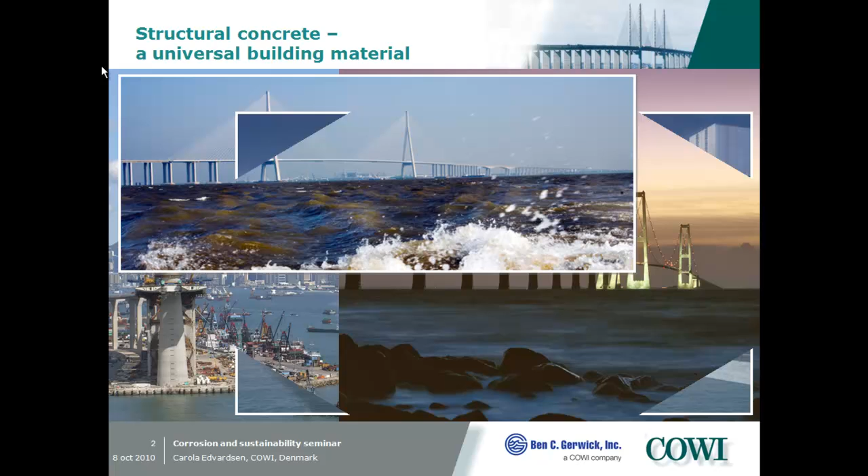Concrete is our most universal and robust construction material which we have on Earth, and has therefore obtained a dominating position in construction. We have designed very spectacular infrastructure projects. Here the last one is a composite bridge in Lucerne.

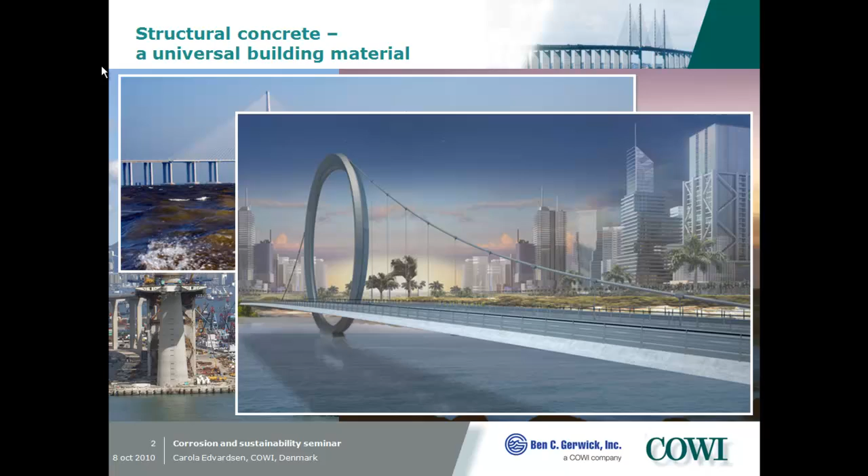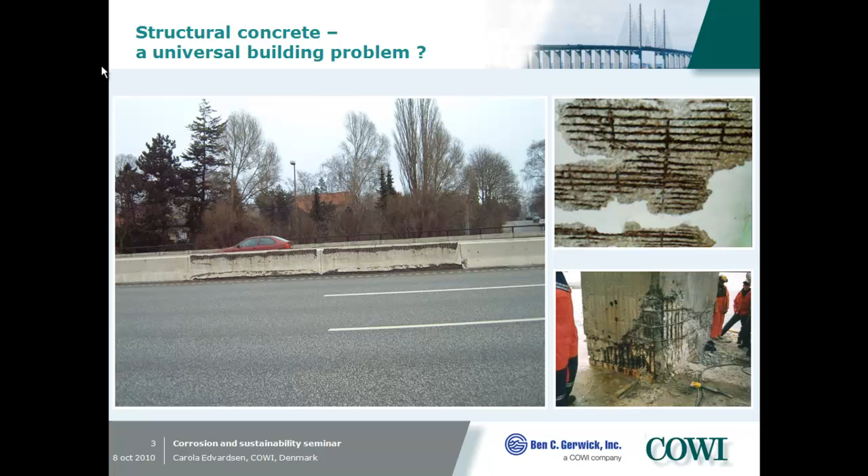Unfortunately, we also see this kind of structure: a heavily corroding crash barrier at a Danish motorway, a deck and a column after, say, 20 years of exposure to the de-icing salt. Similar happens also in this part of the world, very close where we are. Have a look, this is a pier very close to the Golden Gate Bridge. You might know it. Also here, very heavily corroding crash barriers.

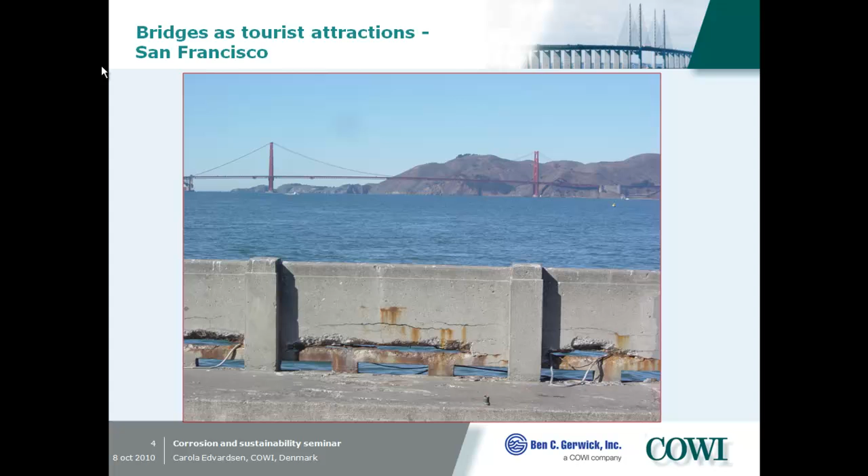The deterioration of concrete structures, or the service life of concrete structure, requires an understanding of the deterioration which is ongoing. Aging and degeneration is a natural and unavoidable process of all construction materials. It is not the question that they degenerate, but the question is at what rate.

For concrete structures, we have normally three typical mechanisms: the electrochemical ones, the rebar corrosion; we have chemical ones, alkali silica reaction, sulfate attack, delayed ettringite formation; and physical ones. I believe you will go into this a little bit more later on.

Nowadays, our clients require service life of about 100, 120, and even more years.

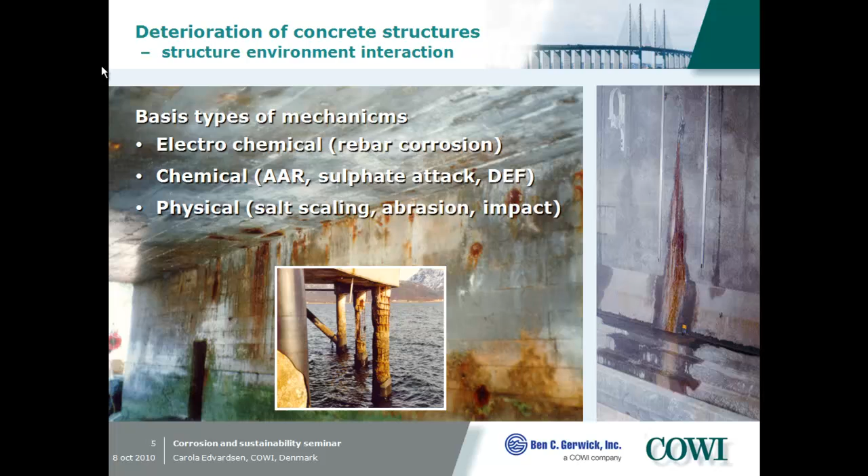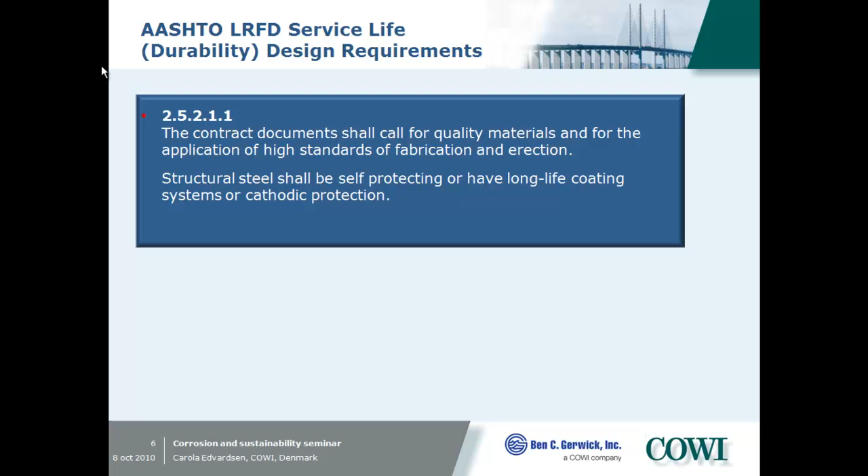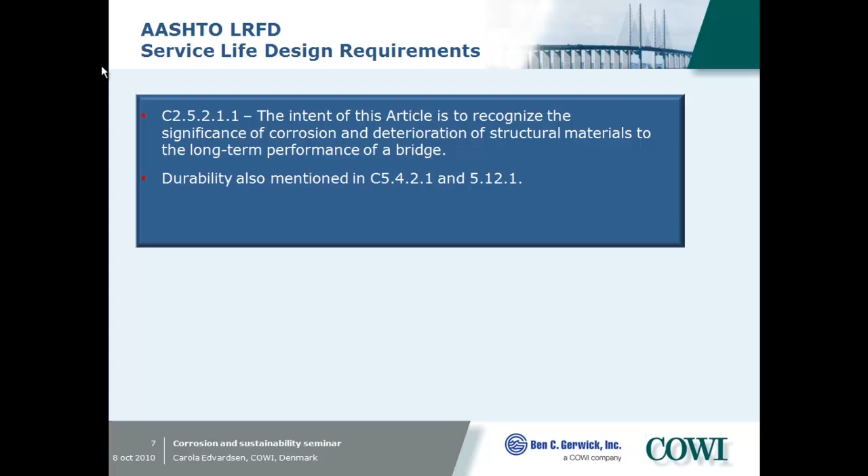Let us see what our traditional codes say, quote, with regard to concrete and durability. I had a look in your standards, and I found very few remarks on concrete durability. They are very general, as quoted here. It is to recognize the significance of corrosion and deterioration. This is very few lines of what we expect in the standards.

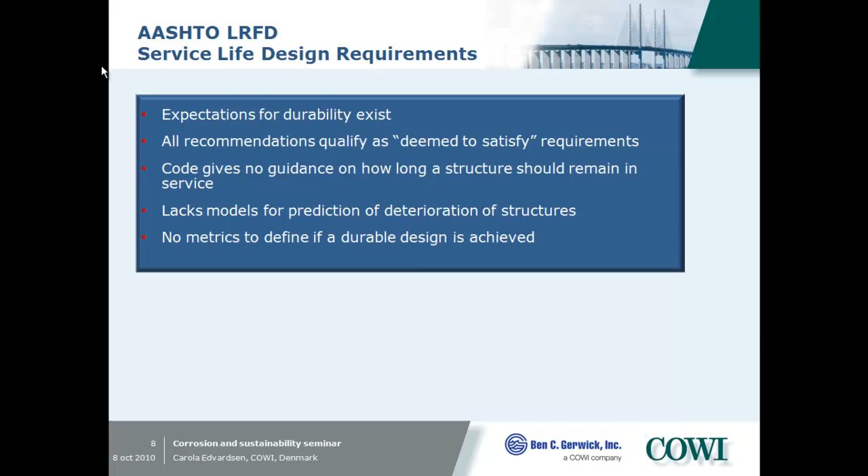We can conclude that there is some expectation for durability in your standard, but all recommendations are qualified as deemed to satisfy requirements. And the standard gives no guidance on how long a structure should remain in service. It lacks prediction models, and there is no test method to verify the service life of a concrete structure. And this accounts not only for your code and standard, this accounts also for a lot of European standards.

This means, and we should be aware of that, all codes normally require the minimum quality. The knowledge in the codes is often based on knowledge which is 10 or sometimes even more than 30 years old. The durability of concrete structure is introduced by so-called substitute requirements. And the service life assumed in the standards is normally only 50 years. But today, our clients demand more. So this means our traditional codes and standards are not adequate anymore as service life design basis.

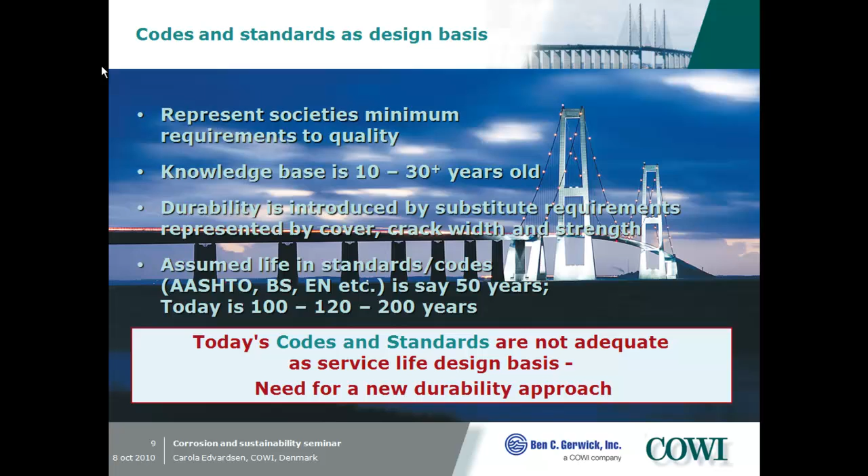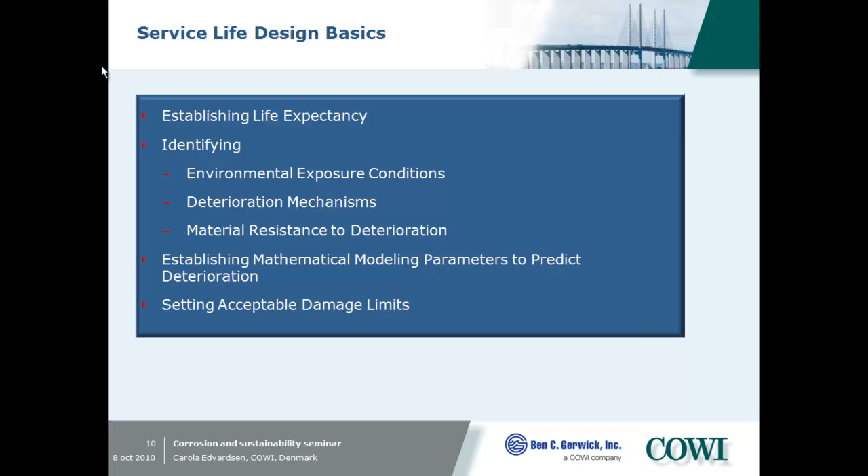We need new durability approaches. And what would we expect as a new durability approach? At least these different items: we have to establish the service life, we have to identify the environmental exposure, we have to identify the decisive deterioration mechanism, we have to establish some mathematical modeling to calculate the deterioration, and we have to set some damage limits, acceptance criteria.

The awareness that our traditional codes are insufficient has been known since the 90s, during the last century, at least in Europe. And therefore we developed in Europe, within a European research project which we called DuraCrete, in the late 90s, a new durability design tool. It's actually a probabilistic-based, performance-based design tool for concrete structures. 12 European partners were involved, starting from the industry to research institutes, contractors, and even clients and owners were involved.

And this new tool, which has been developed within this European research project, is commonly called DuraCrete. COWI was the scientific manager of this DuraCrete project. This new durability tool

is now implemented in the new FIB model code for service life since 2006. It has heavily been used in Europe, and in addition it will be implemented in the new FIB model code, which has been presented in Washington this year.

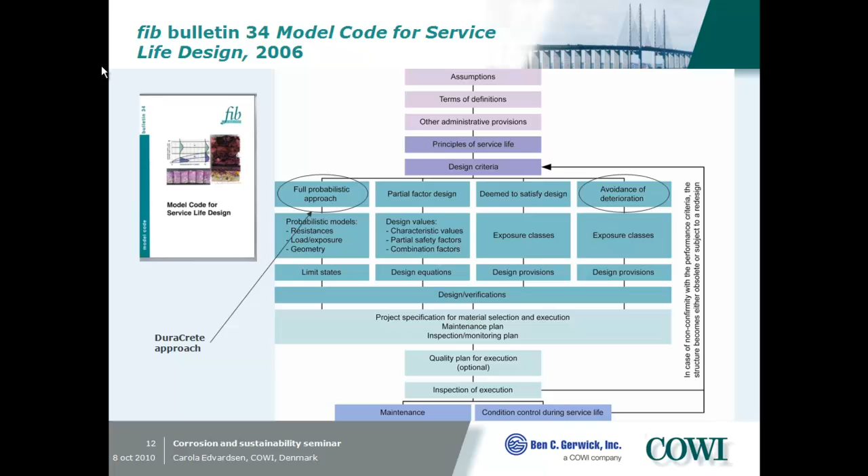Here again there are 2 approaches. To the left, the full probabilistic approach. Within this full probabilistic approach, which accounts for carbonation and chloride-induced corrosion, the deterioration will be modeled. And this modeling is the key tool to make a true service life design. You might know all this service life which we have for concrete structure here.

Normally we have an initiation and a propagation phase. And within the purpose of this full probabilistic approach, we find the optimal design. This means the optimal cover or the minimum cover, and the optimal material to resist the deterioration for at least a certain period of time.

In contrast to that, strategy B says you have to avoid the deterioration right from the beginning. We can use non-reactive aggregate, sulfate-resistant cement, we can use steel fiber reinforcement, stainless steel, cathodic prevention, protection.

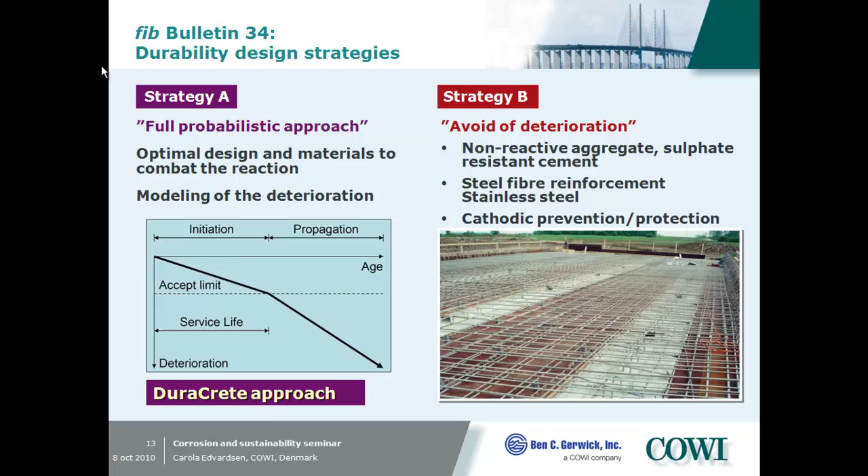I will show a bit more of the full probabilistic approach. Here are the different steps of the full probabilistic approach, which I will call DuraCrete in the following, but it's nowadays similar to the fib model code.

There are different steps, and the first step is to define or select the decisive deterioration mechanism. Is it chloride-induced corrosion, or carbonation-induced corrosion, or something else?

Then we have to define the limit state. The client has to say what determines the end of the service life. Is it the corrosion start? Is it the cracking of the concrete, or the spalling of the concrete?

Then we have to define an acceptance criteria. This means the probability of having corrosion after 100 years or 200 years. And as it is a probabilistic approach, all parameters have to be quantified in a statistical way. I will show this further.

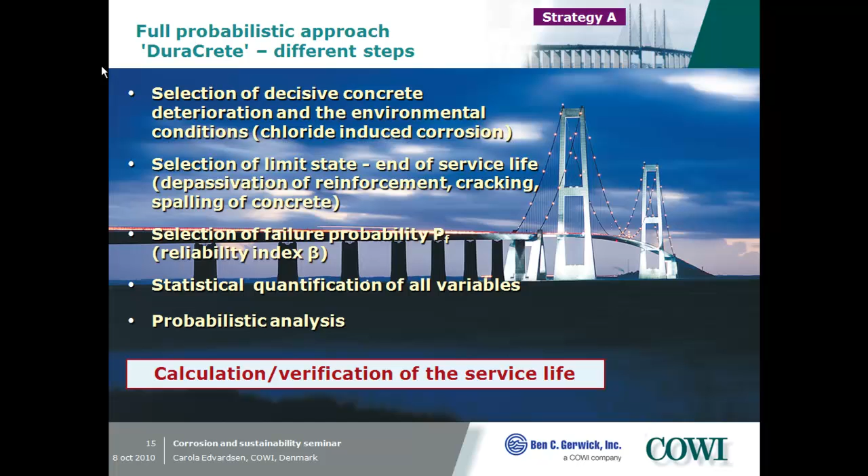Here is the first step, the selection of the limit state. The limit state means the end of service life. For chloride-induced corrosion, the end of service life is normally the period when corrosion starts.

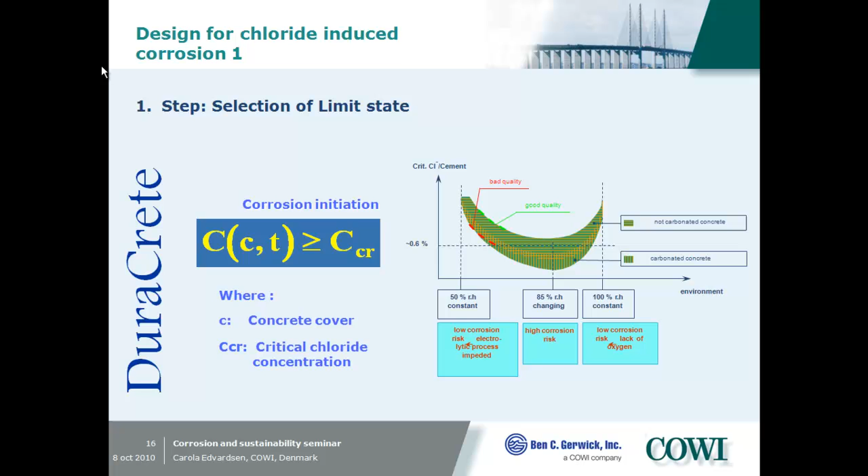In our case, we define the limit state as when the critical threshold limit is achieved at the reinforcement. This critical chloride threshold level depends on a lot of influencing parameters, as you can see here in this illustration to the right.

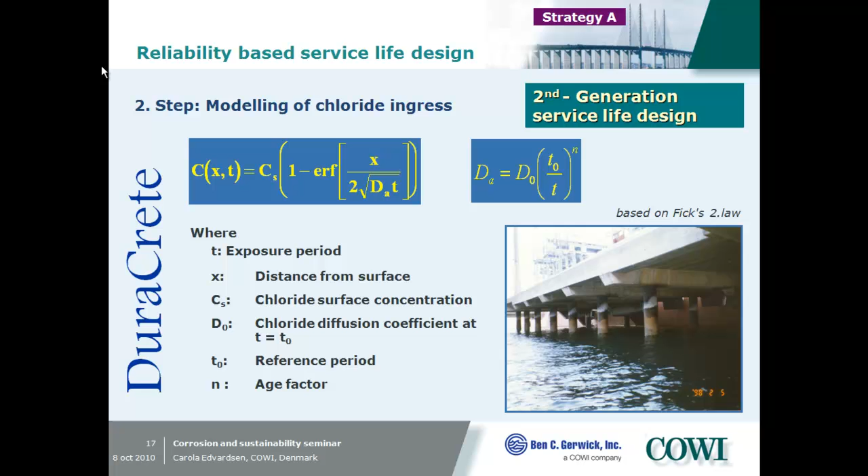The next step is modeling the deterioration. In that case, we use a model based on Fick's Second Law, which is a well-known model for chloride ingress, but modified by a chloride migration coefficient, D, and by an age factor, because we know the concrete becomes denser with time. This means the chloride migration coefficient decreases with time, and this is the famous age factor here on top.

The next thing is to put in the input parameters. As a probabilistic approach, all input parameters have to be defined by a mean value, a standard deviation, and a distribution function. Here again, the chloride migration coefficient, for example, a reasonable value for Portland cement and fly ash cement. This chloride migration coefficient is one of the key durability parameters which the contractor has to comply with. It's similar to the compressive strength.

If we make a structural design, we specify a compressive strength class, for example C40, and the contractor has to produce a concrete with this compressive strength, making a lot of testing during pre-testing and production testing. Similarly, we now require this for the chloride migration coefficient. It's a functional requirement in our concrete specification, and the contractor has to comply with that during pre-testing, full-scale testing, and production testing.

It's a very new approach, but I must say our contractors in Europe have adopted this approach over the last 5 to 10 years.

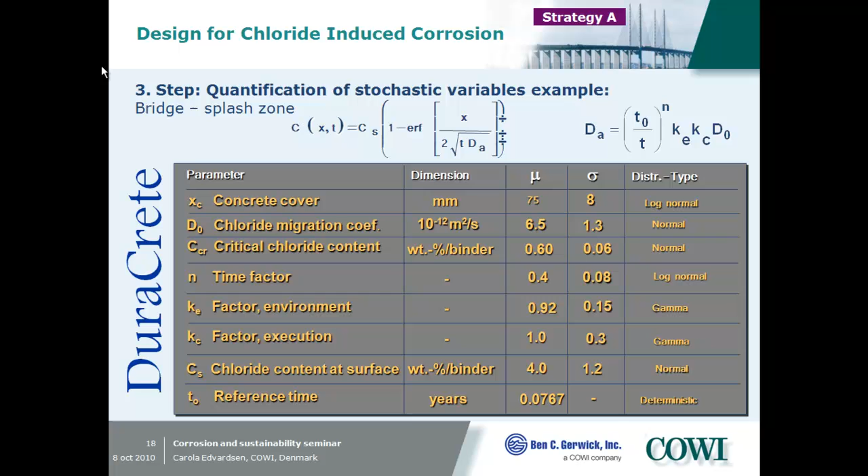So they measure the diffusion coefficient instead of doing column tests? Yes, and I will come back to this again. Yes, this is very interesting.

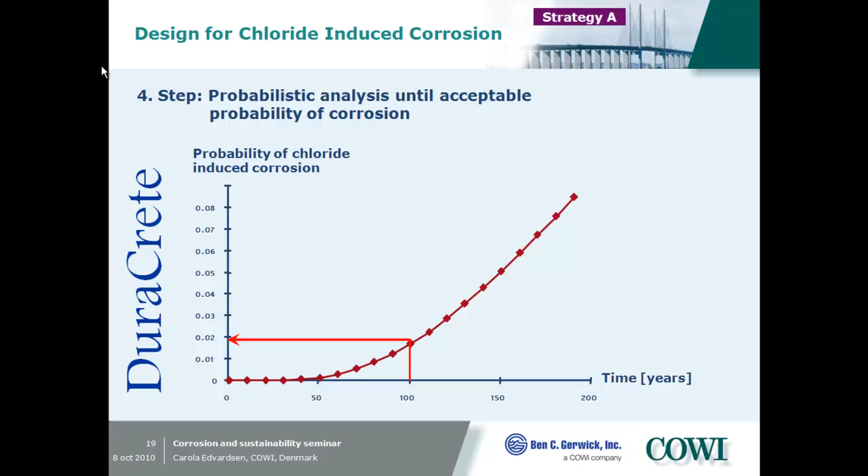At COWI, we have used this DuraCrete or fib model for the last 10-12 years on all our larger infrastructure projects - tunnels, bridges, and marine construction - especially if they are exposed to an aggressive environment. This tool allows us, as a consultant and designer, to calculate the minimum cover and the maximum chloride diffusion migration coefficient to ensure a service life of 100, 150 years, or whatever is required.

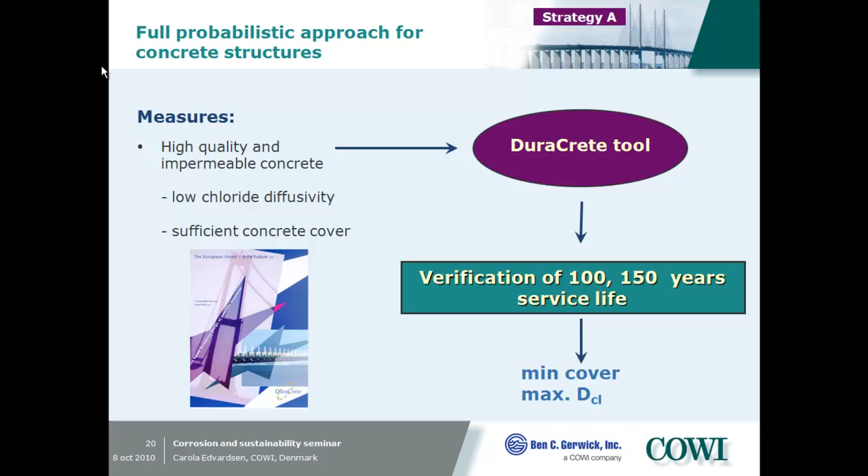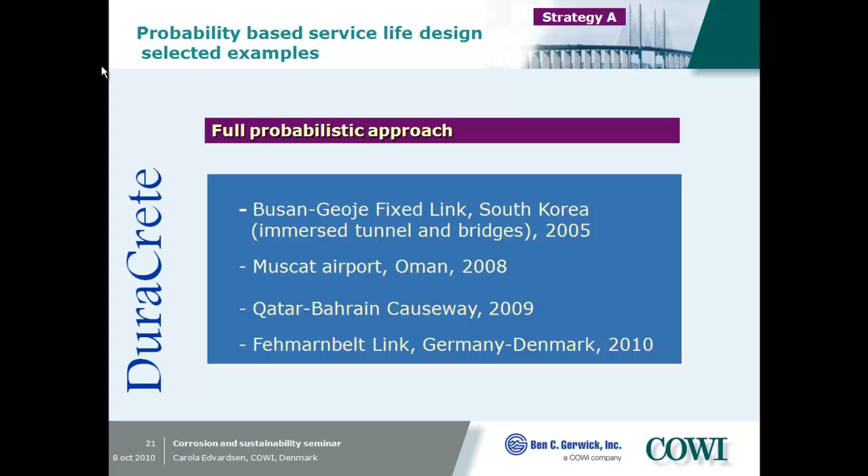I will show some examples. The first example where we used this approach at COWI is in South Korea - the Busan-Geoje fixed link, which connects the city of Busan, Korea's second largest city, and the island of Geoje.

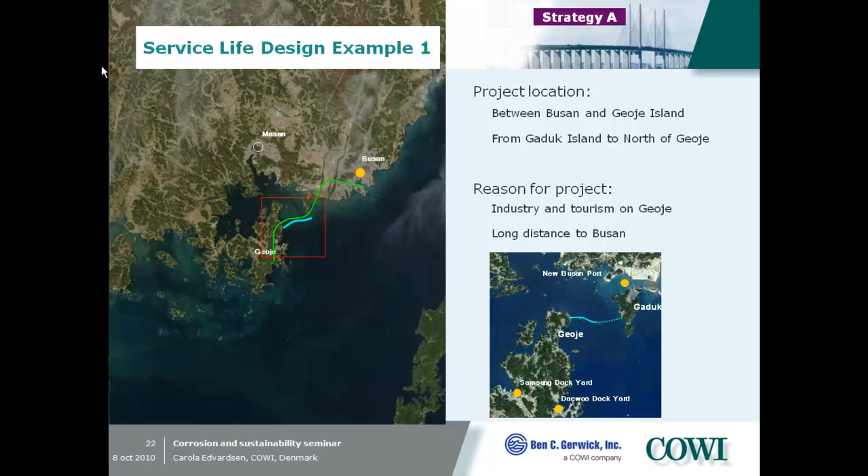The reason for the link was to shorten the distance between these two cities. The link consists of an immersed tunnel, which you can see here - it's the deepest immersed tunnel in the world with 50 meters of water pressure, giving high demand on the water tightness of the joints and so on - and two cable-stayed bridges here.

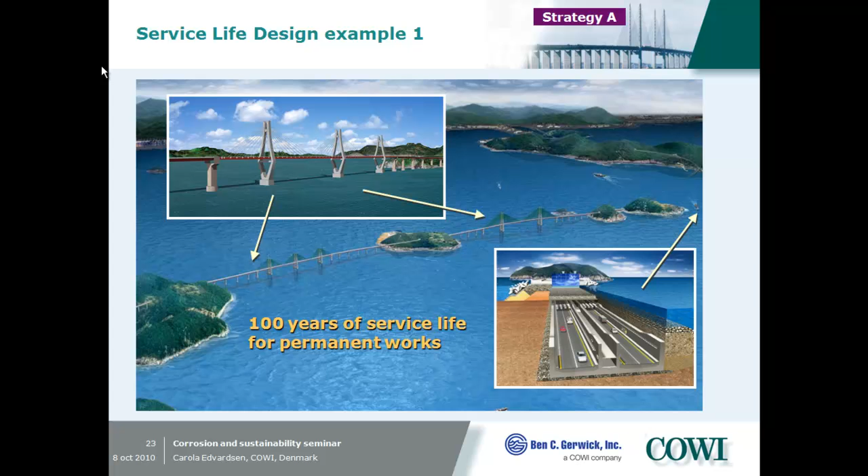The client required 100 years of service life according to the design basis, and the contractor...